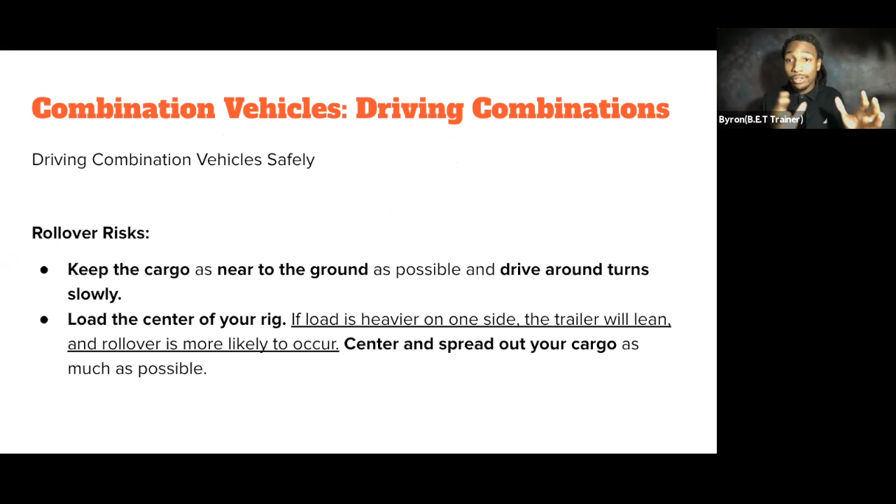When it comes to driving combination vehicles, tractor trailers or 18 wheelers, there are rollover risks, so you want to keep the cargo as low to the ground as possible, and drive slowly around turns because it's a big vehicle. You're not just driving a straight truck, you're driving essentially two vehicles connected together.

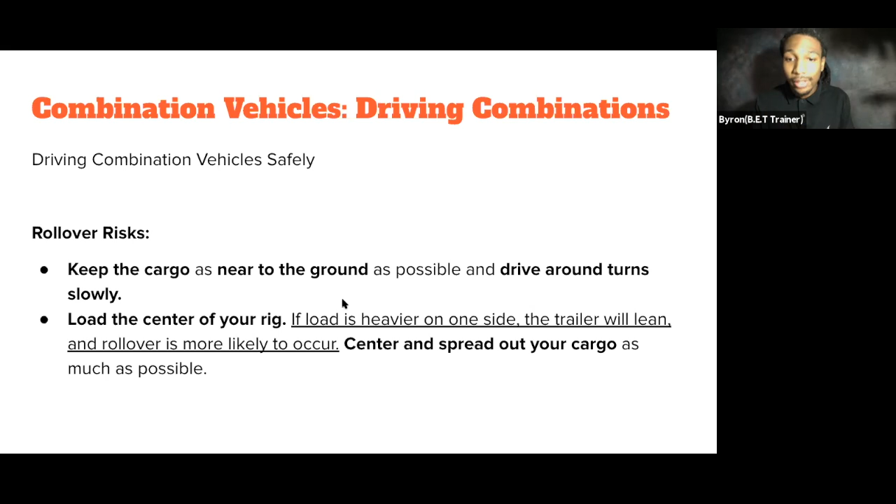Also, you want to load the center of your rig. If the load is heavier on one side or the other, you want to balance it out by putting it in the center and spreading out your cargo as much as possible.

Also, you want to steer gently, and follow far enough behind other vehicles. You don't want to make sudden movements either, because given it's a combination vehicle, you want enough space to have at least 1 second for each 10 feet.

Keep in mind the spacing: trucks and commercial vehicles need a longer gap in order to stop safely. When braking early, keep in mind that with a light load, brakes give poor traction, because combination vehicles and tractor trailers are made to have weight contained in them for the brakes and vehicle to work properly.

With a light load, the brakes not only give poor traction, but it makes it very easy for the wheels to lock up. Therefore, the trailer could swing out and strike other vehicles, and your tractor can jackknife very quickly. So keep in mind, with a light load, the trailer can swing out and strike other vehicles, ending in a jackknife.

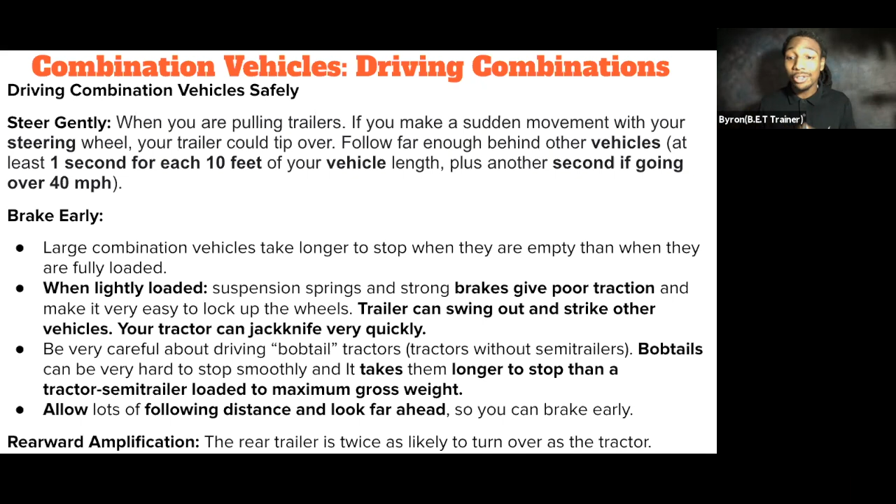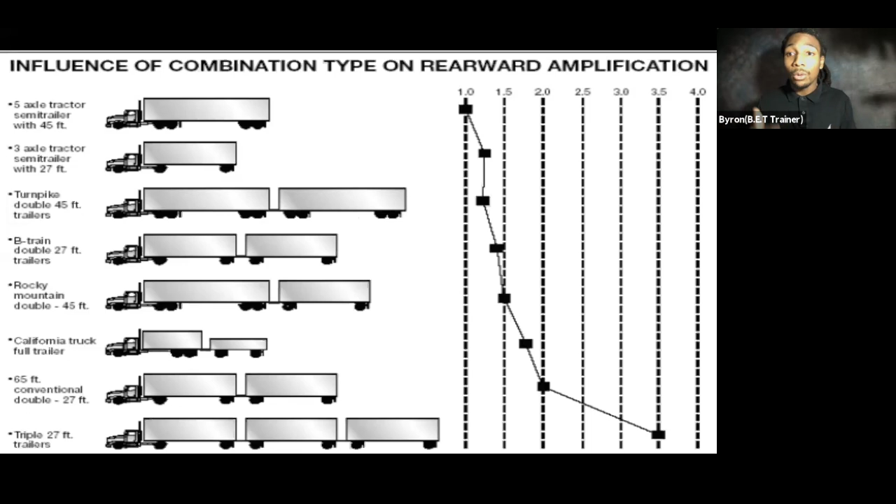This diagram shows that the larger the size of the combination vehicle and the weight of it, the more the rearward amplification effect will come into play, meaning the trailer would tend to turn over very quickly, like in a jackknife. Just keep that in mind.

Depending on where you're going, you have to keep in mind the single axle tractor pulling a long trailer with it, and the landing gear is set to accommodate it.

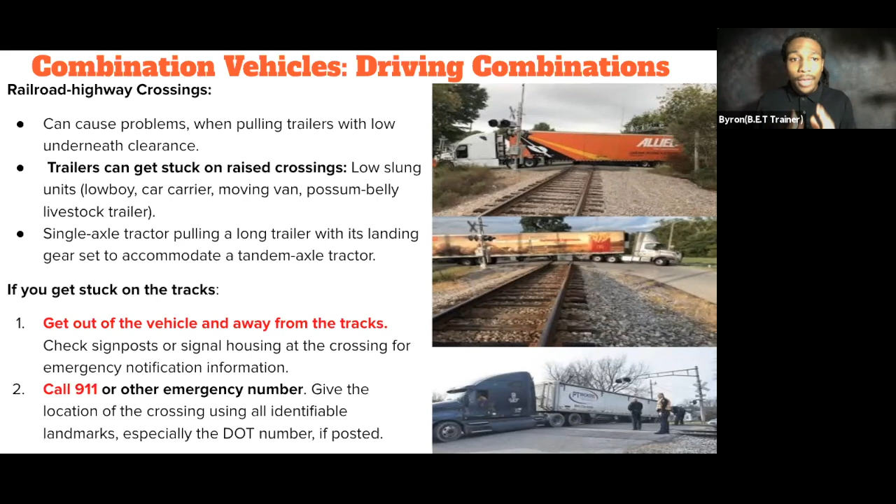In other words, if you do get stuck on the tracks, you must get out of the vehicle and away from the tracks. You have to check for any signal post or housing near crossings, anywhere you can call 911 or another emergency contact, so you can give them the location of the truck and your DOT number if posted, so that safety precautions can be met.

When it comes to preventing trailer skids, the best way is to see it in your mirrors. You have to remember too that once the trailer swings out of your lane, it's really difficult to prevent a jackknife.

Some techniques to keep in mind: when you're using the brake, you want to release the brakes in order to regain control of the vehicle. And you do not want to use the trailer handbrake, because the trailer handbrake is for the trailer.

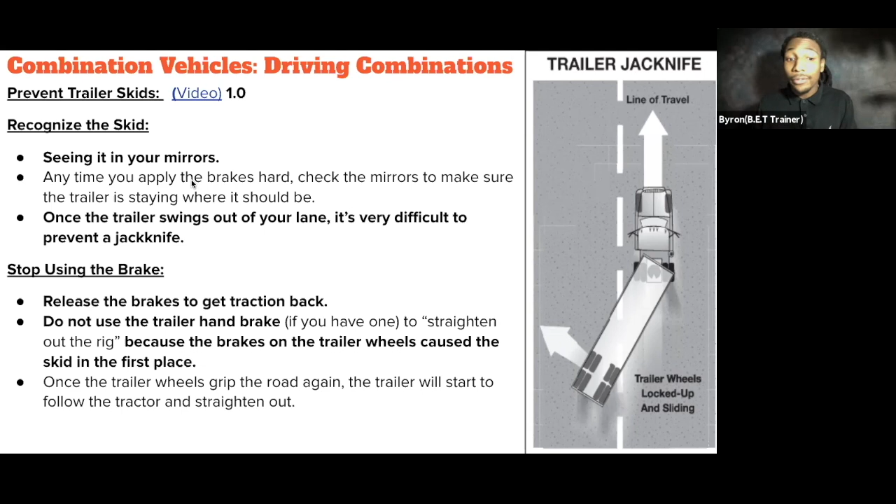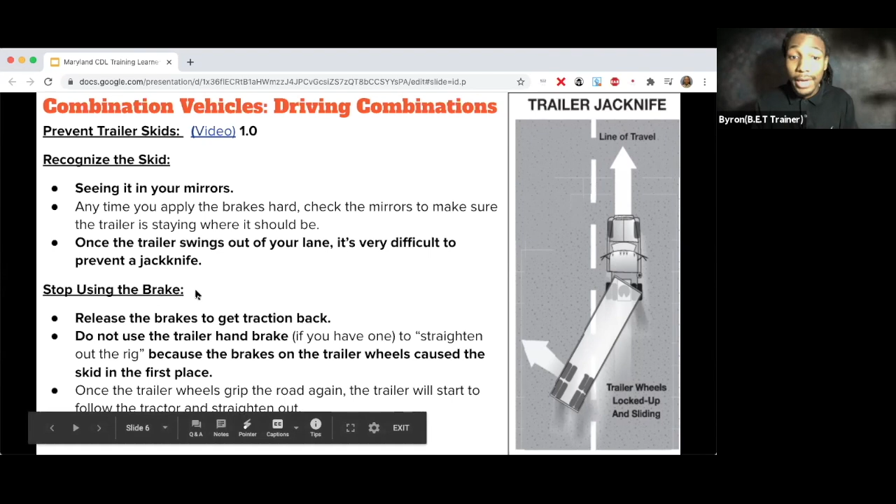The trailer actually is the one that caused the skid in the first place, so you do not want to use the trailer handbrake. Remember, once the trailer wheels grip the road again, the trailer will start to follow the tractor and straighten out. That's definitely something to keep in mind, and this is also going to be on the learner's test for combinations, so remember this.

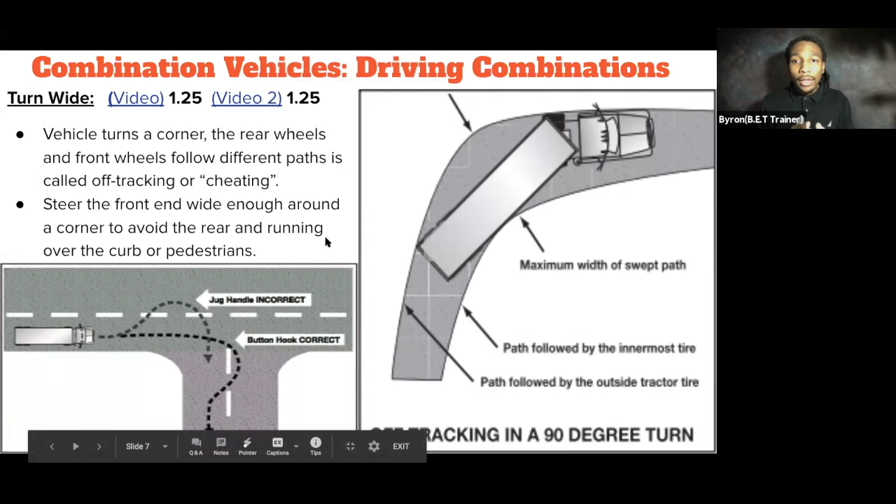Now, when it comes to turning the tractor trailer wide, when you turn the corner, the rear wheels and front wheels follow different paths, and that's called off-tracking or cheating. As you can see in the right hand diagram, when you're turning you want to steer the front end wide enough around that corner in order to avoid the rear wheels running over the curb. So in order to prevent going over the curb, you need to steer wide enough. This shows you different ways of how to do that, the best and correct way of steering.

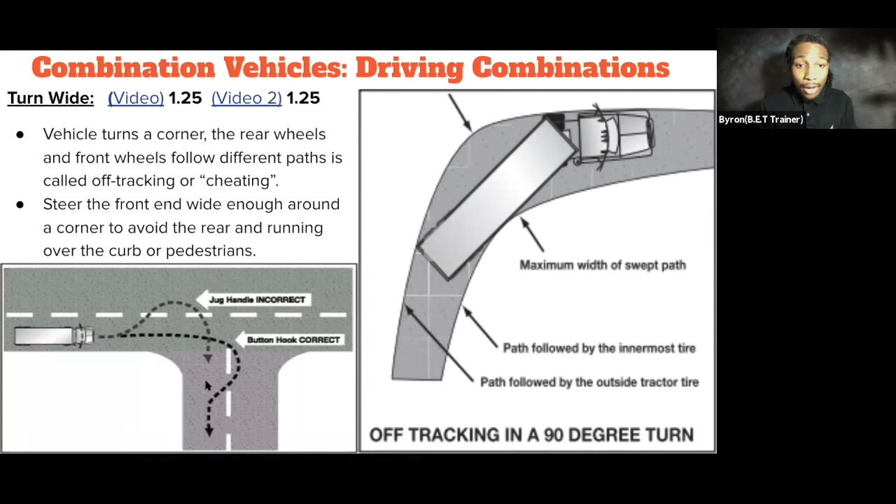When it comes to backing the trailer, this is important. The biggest concept is that you know how with a straight truck, when you back up, if you try to go left, you turn the wheel left. If you're trying to go right, you turn the wheel right.

Well, it's kind of the opposite when it comes to backing up a tractor trailer. When you put it in reverse, if you want to go right, the trailer has to go right. But in order for the trailer to go right, you have to turn the wheel to the left, so that the trailer will go to the right. Then once the trailer goes to the right, you follow and start turning the wheel to the right. Same thing with the other side: if you want the trailer to go left, you have to turn your wheel first to the right. Then when the trailer turns to the left, you start following that trailer and turning your truck to the left. So if you're trying to go right, turn the wheel to the left. If you're trying to go left, turn the wheel to the right. That's the best way to remember that.

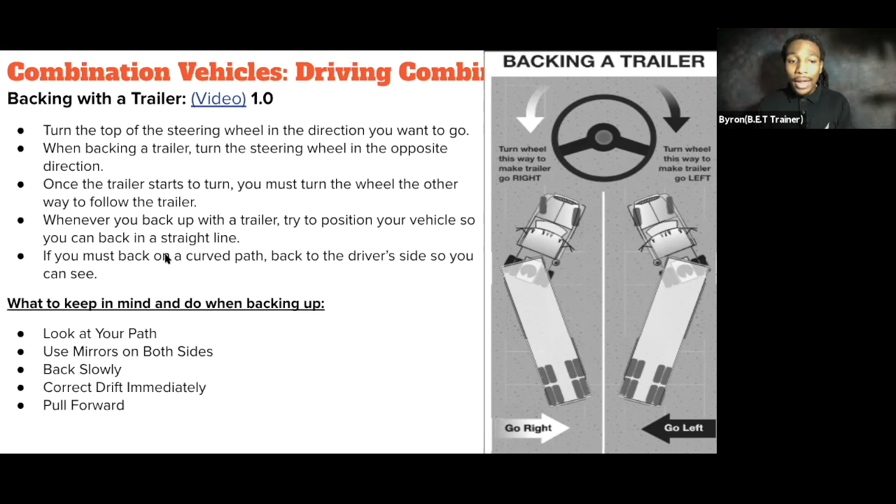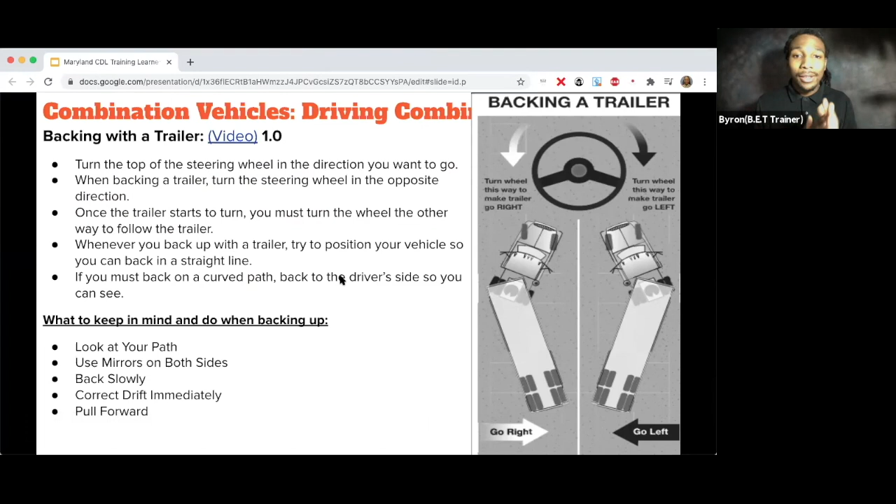You want to keep in mind that when you're doing this, you want to look at your path, use mirrors on both sides - very important. My dad always told me, if you can't read your mirrors, you can't drive, because that is crucial. You want to back slowly and correct drift immediately, as well as when pulling forward. Keep in mind there are different types of backing, but you have to remember the steps and what to keep in mind when backing a trailer.

When it comes to air brakes on a combination vehicle, first we have to talk about what the parts are in order to really understand how all of this works. On tractor trailers, you have the trailer hand valve, which you use to apply the trailer brakes, independent of the towing vehicle brakes. It's usually a push or pull type valve near the driver that supplies air to the trailer brake system through the supply line - that's the trailer hand valve.

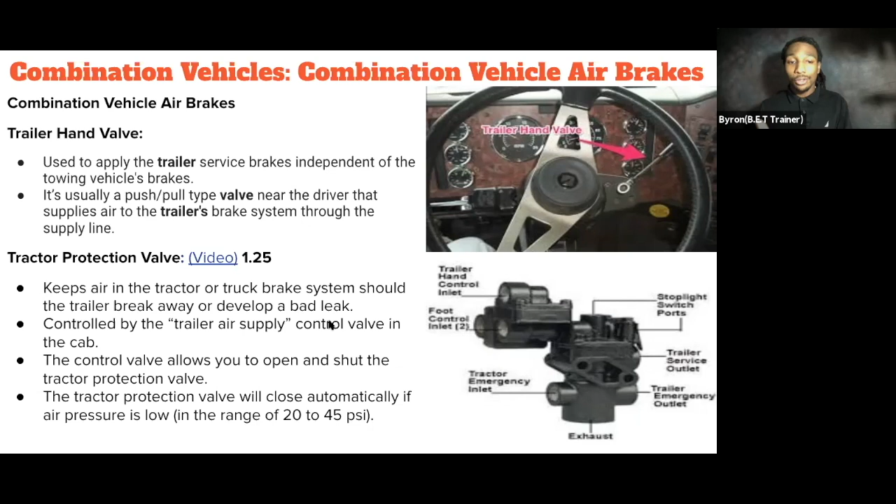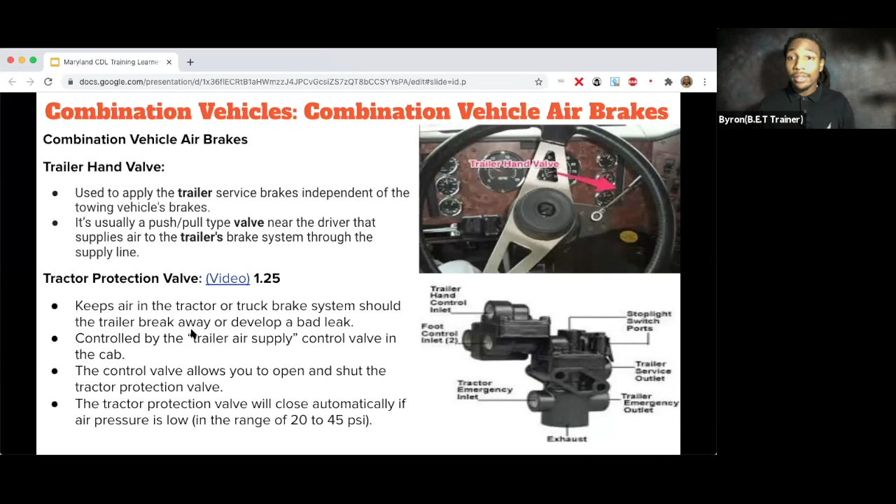Now, the tractor protection valve keeps the air in the tractor or truck braking system, should the trailer break away or develop a bad leak. It's controlled by the trailer air supply control valve. So the trailer air supply is for the trailer. What to keep in mind is that the tractor protection valve, for the trailer air brakes, will close automatically when the air pressure is low, between approximately 20 to 45 psi - that emergency trailer brake will pop out between 20 to 45 psi. Again, the trailer air supply control is used to control that tractor protection valve we mentioned earlier, and the valve will pop out when the air pressure drops to approximately 20 to 45 psi.

Remember this: the emergency position is used to shut the air off and to put on the trailer emergency brakes. You have to remember that the tractor protection valve controls, or the emergency valves on older vehicles, may not operate automatically. So there may be a lever, rather than a knob, and the normal position is used for pulling a trailer.

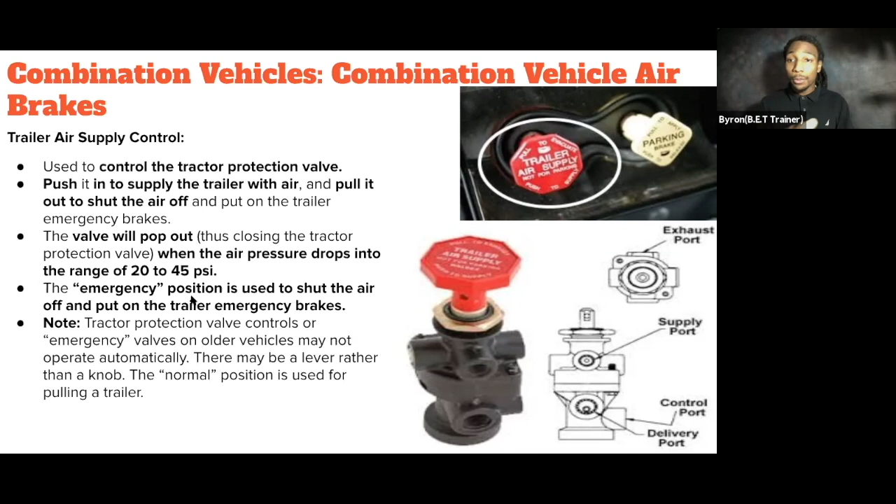Keep in mind the emergency position is used to shut off the air and put on the trailer emergency brakes. Meaning that when you pull that trailer valve out, the emergency brakes are activated.

Now, when it comes to the lines, read in between the lines, but you have different types. You have two airlines: one is the service line, which is blue, the other is the emergency line, which is red. You also have a third line, but that is not an airline. That's an electrical line, used to connect the electricity from the trailer to the tractor. Keep in mind that the service airline, which is blue, allows air to go to the service brakes, while the emergency airline, which is red, goes to the trailer emergency brake.

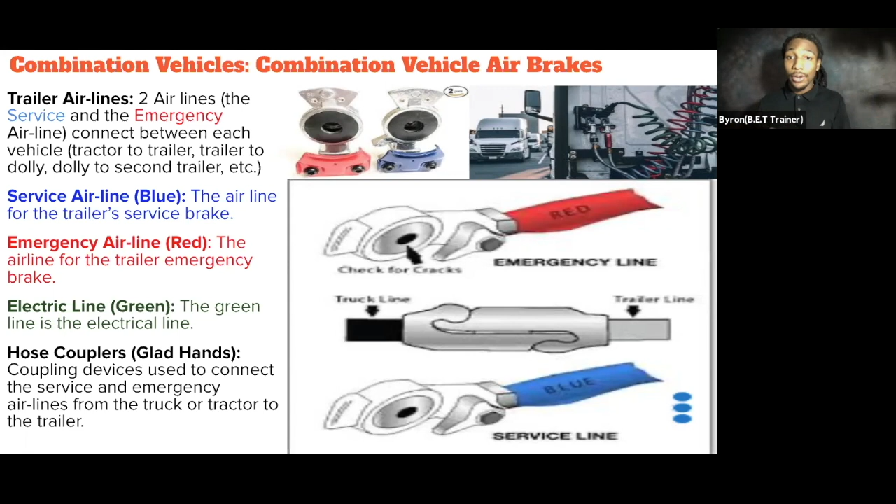Now, when it comes to the trailer air tanks, they're filled by the emergency supply line from that tractor, and they provide air pressure used to operate the trailer brakes. Air tanks, air supply contains air tank - that's a way to remember that.

Now, when it comes to shut off valves, those are used in the service and supply airlines at the back of the trailers, used to be able to tow other vehicles. The valves permit closing the airlines off when another trailer is not being towed. Remember, you've got the trailer service, the parking, and the emergency brakes.

As we mentioned in air brakes in week 2, it's all the same thing, just different names for different functions. The trailer service, parking brake, or emergency brakes are all three basic braking systems.

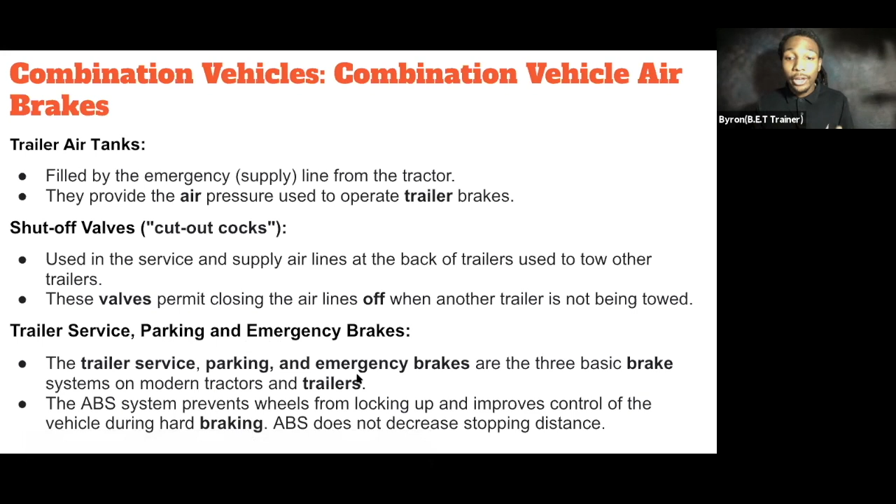Now, ABS, anti-lock braking system, prevents wheels from locking up and improves control of the vehicle during hard braking. It doesn't mean that it decreases stopping distance.

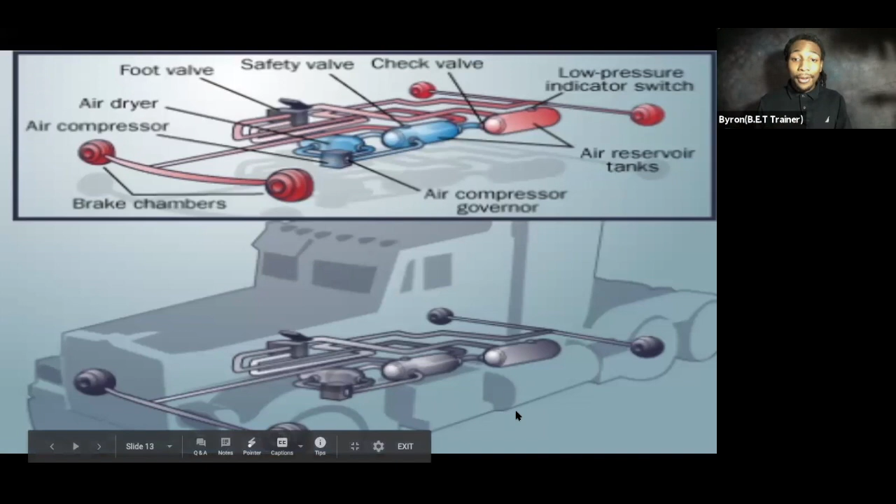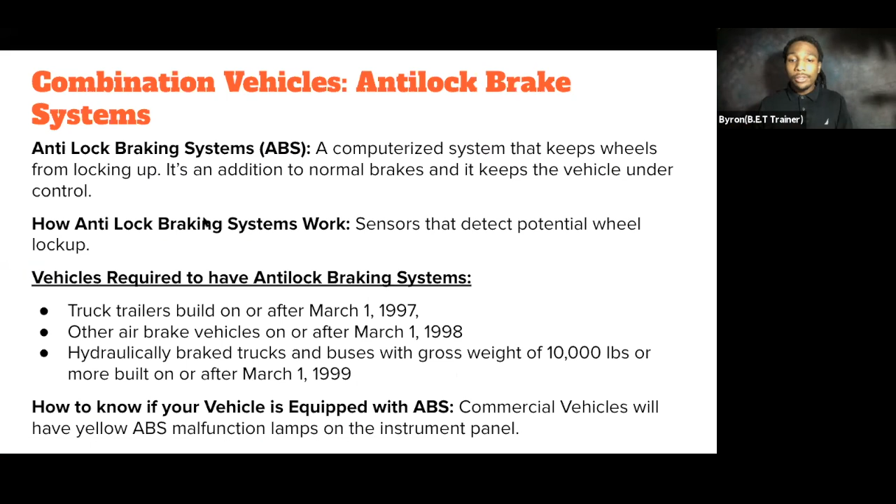Here's another diagram view of the main parts, such as the foot valve and the air reservoir tanks. All of these components together are very crucial and important. We mentioned anti-lock air braking systems in week 1 with general knowledge, and week 2 in air brakes, so this is just a reminder of the anti-lock braking systems.

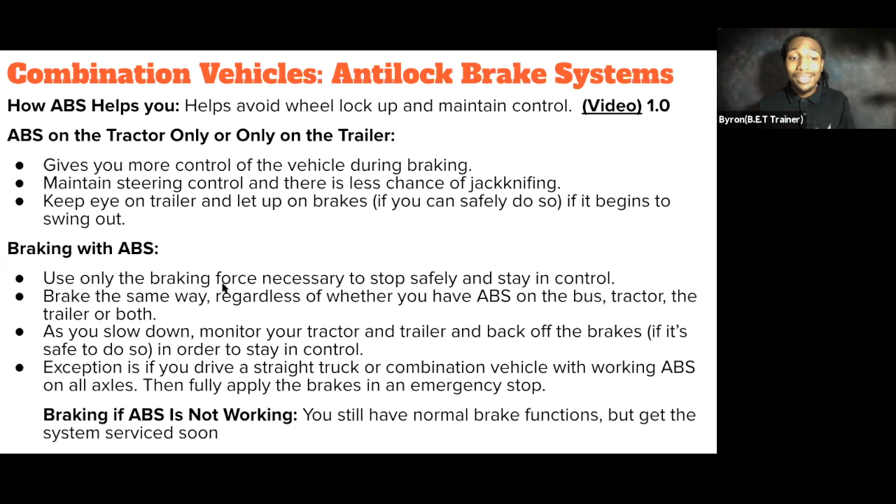Remember that the ABS on the tractor or only on the trailer gives you more control of the vehicle during braking. When you maintain steering control, there is less chance of jackknife. Just remember, braking with ABS, you only use the braking force that is necessary.

Now, when it comes to anti-lock braking systems, you brake as you always have. Just remember, as you slow down, you monitor your tractor and trailer, and you back off the brakes when it's safe to do so, in order to keep control. We want to tend to brake, but sometimes you have to ease off the brake pedal and just maintain, and you tend to have more control that way.

The trailer is less likely to swing out, but if you lose steering control or it starts to jackknife, you've got to let up off the brakes. Don't hold the brakes, just let it off.

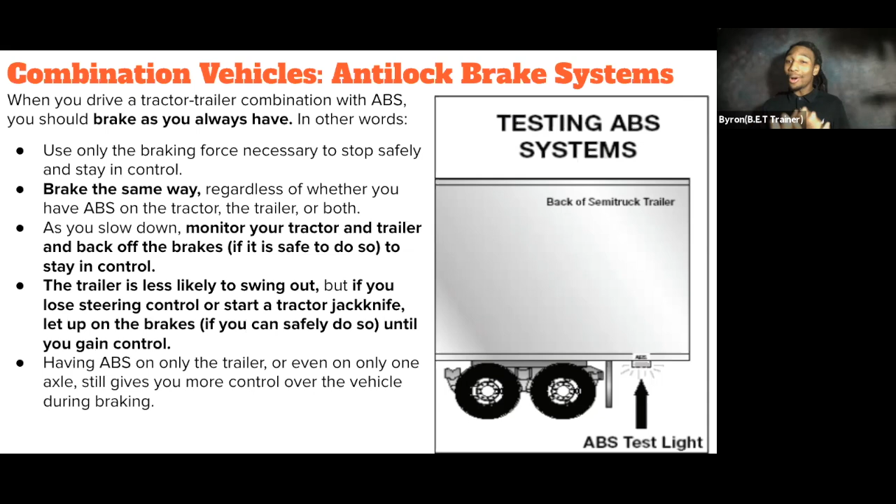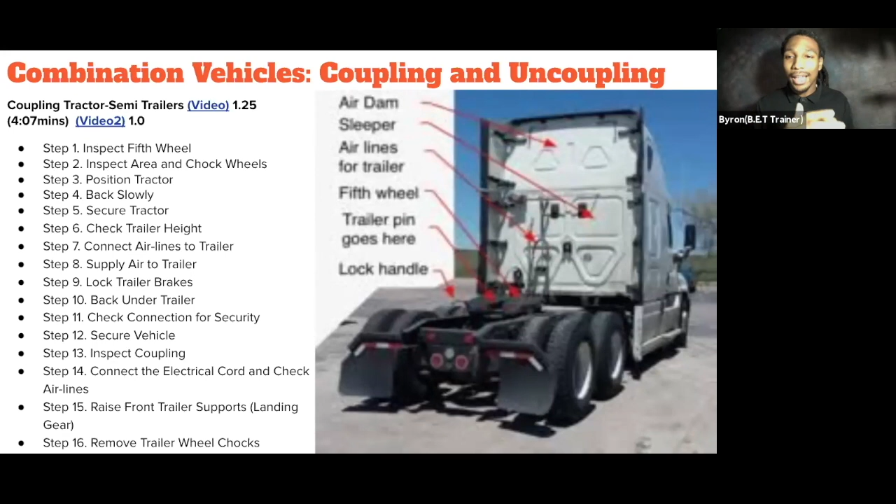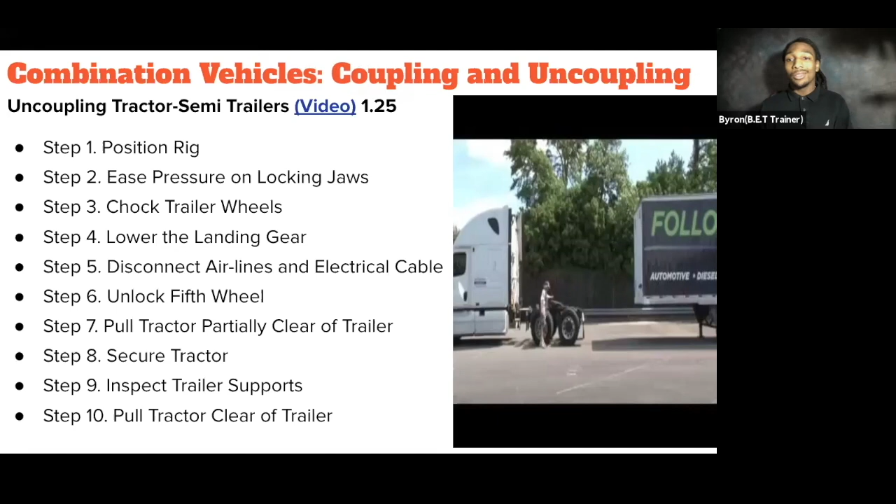Now you probably were saying, alright, I know how to couple, but what about uncoupling? Well, don't worry, we're going to go over that now. Just remember those steps, those orders, and of course that definitely won't take time. But once you remember, it's a number system.

10 steps to uncoupling, that's 1, 2, 3, and as you go ahead, say this to yourself. This will definitely help you remember, and it will help you retain information very, very well.

Now, you do have to remember when it comes to coupling a pintle hook as well. So, 4 steps to coupling that: 1, inspect the pintle hook, unlock the lock pin, open the latch. 3, lower the drawbar into place.

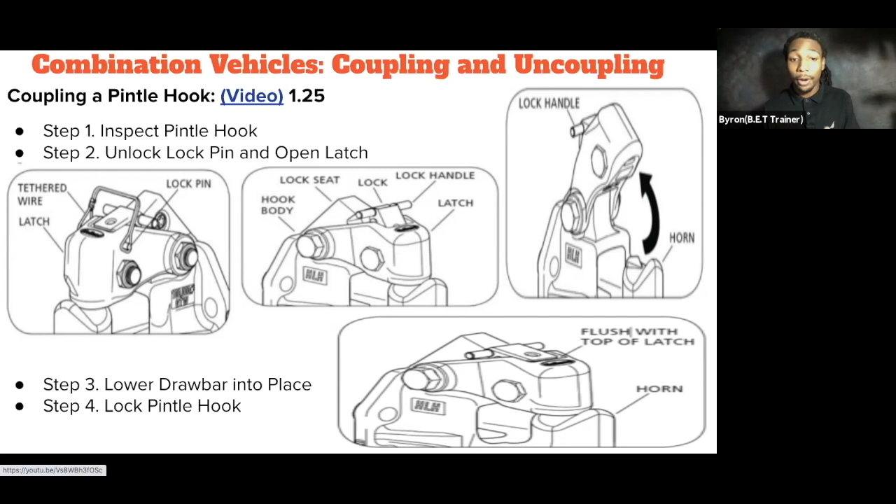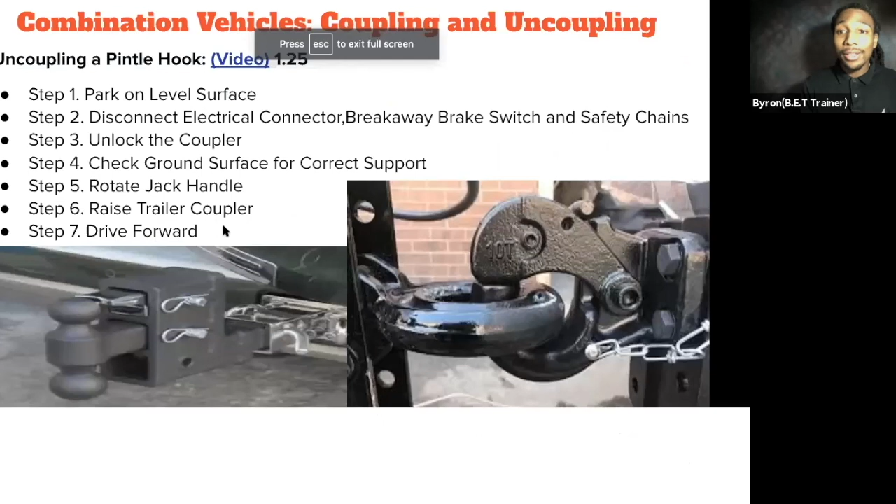Step 4, you want to lock the pintle hook. What is a pintle hook, and how are you using that? How is it best to use it? Now, of course, the steps of uncoupling the pintle hook are very crucial as well.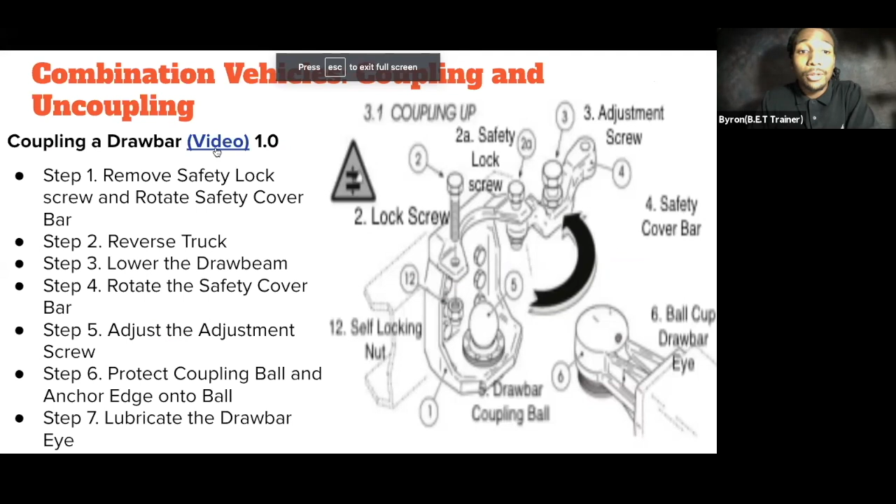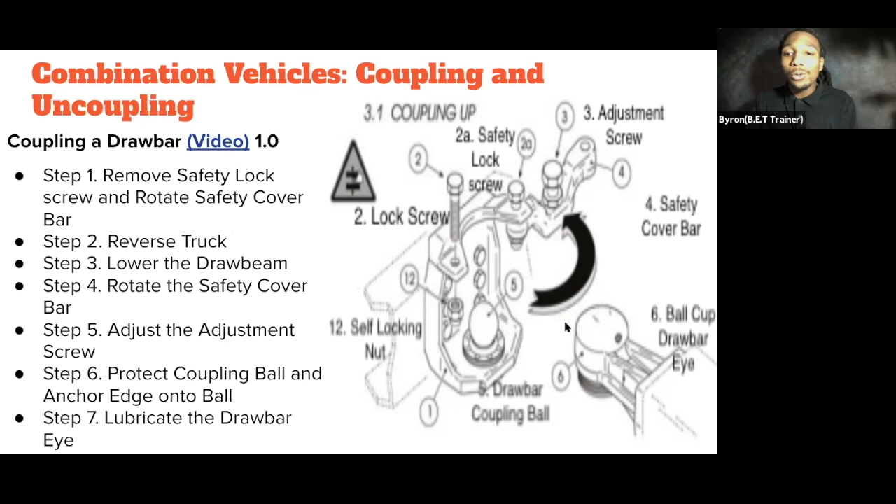Now, when it comes to coupling a drawbar, you want to safely lock the screw, remove the safety lock screw, and rotate the safety cover bar. Remember, these are the 7 steps to coupling it. This diagram shows the parts and how it's connected.

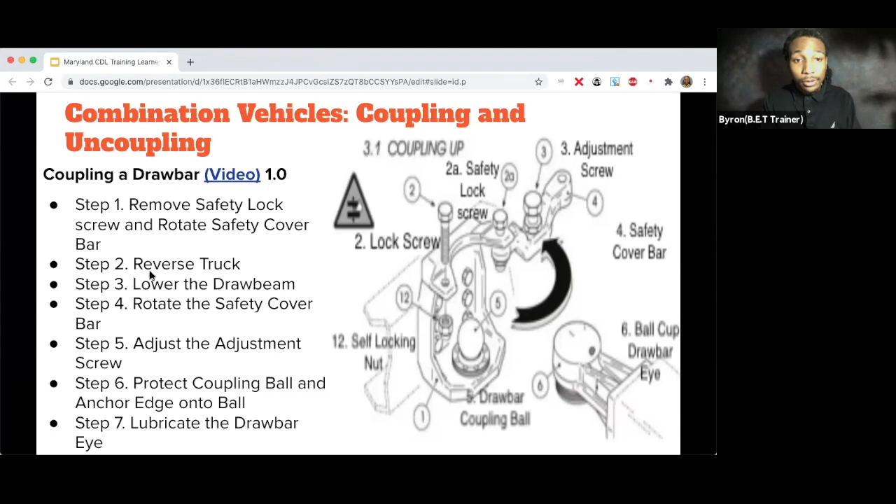Just remember, when it comes to coupling a drawbar, there are 7 steps you want to remember. When it comes to uncoupling a drawbar, the 4 steps are: turn the trailer brake on, remove the cover and loosen screws, rotate the safety cover bar and lift the trailer drawbeam, then lock the safety screw and tighten the self-locking nut. This diagram shows the parts and how they're connected.

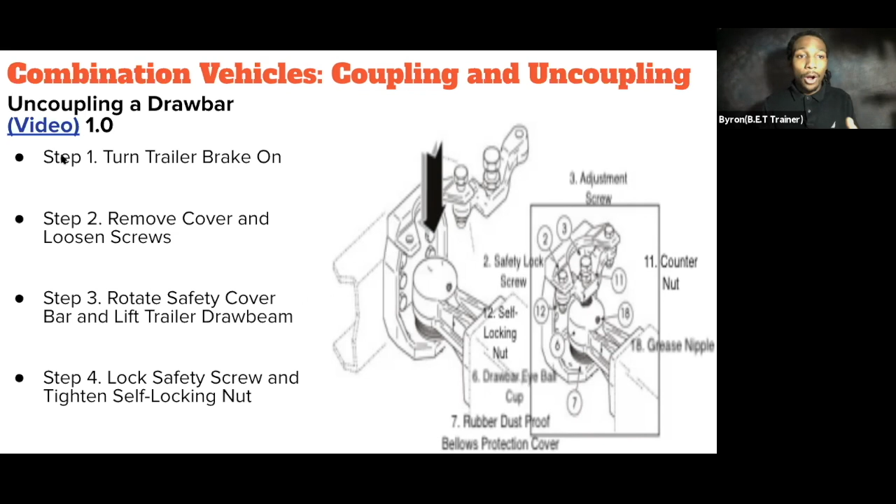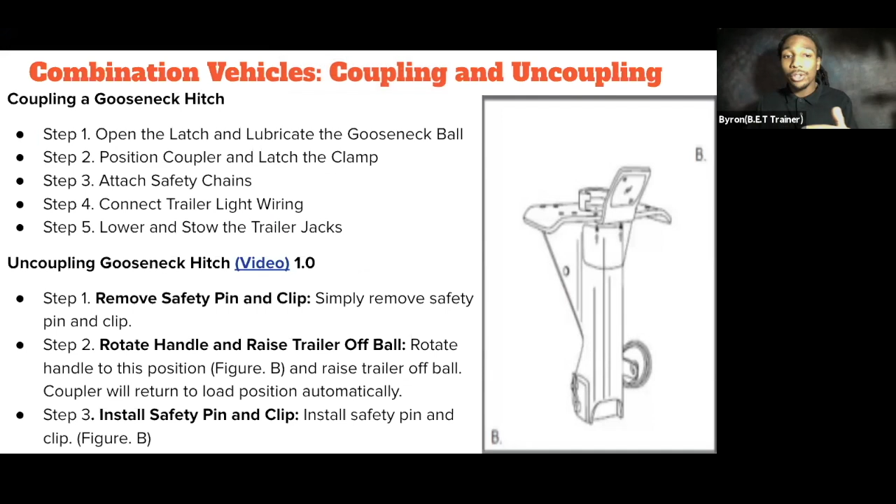When it comes to coupling a gooseneck hitch, step one, open the latch and lubricate the gooseneck ball. Step two, position the coupler and latch the clamp. Step three, attach the safety chains. Step four, connect the trailer light wiring. Step five, lower and stow the trailer jacks.

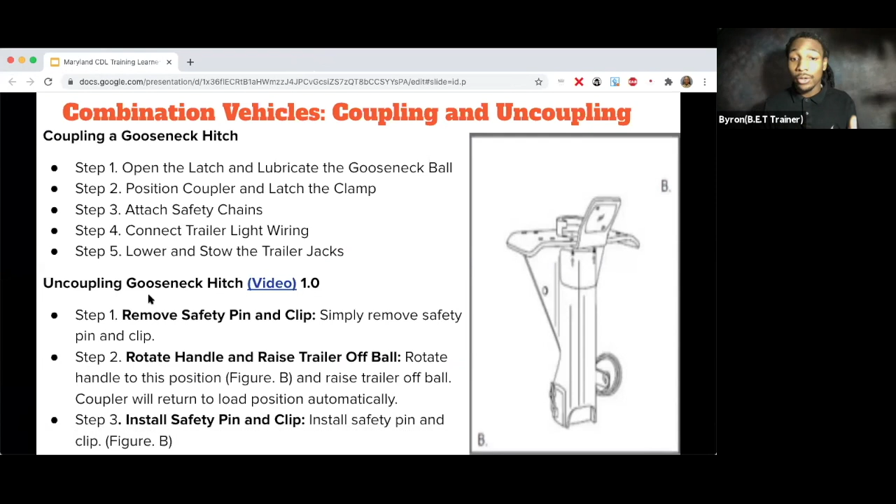That's the steps to coupling and uncoupling a gooseneck hitch. Remember, the first step to remove it is to remove the safety pin and clip. Second, rotate the handle and raise the trailer off the ball. Third step is to install the safety pin.

Now, when it comes to additional things to keep in mind, you have the fifth wheel, the air and electrical lines to the trailer, the sliding fifth wheel, and the landing gear. Remember that when fully raised, you want to make sure there are no missing parts, nothing bent or otherwise damaged, and you want to crank the handle in place and secure it. If power operated, check for no air or hydraulic leaks.

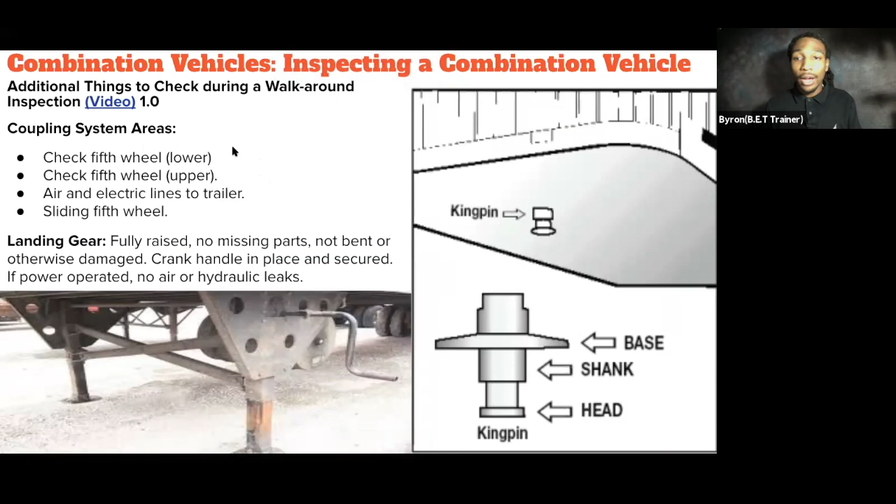Now, you also want to check that the air flows when checking the brakes. You want to check that air flows to all of the trailers. Use the trailer hand brake, which provides air to the service line. Then open the emergency line shut-off valve at the rear of the very last trailer, and you should hear air escaping, which shows the entire system is being charged.

When it comes to testing emergency brakes, you want to pull gently on the trailer with the tractor to check that the trailer emergency brakes are on. When testing the service brakes, check the normal air pressure, release the parking brakes by pushing it in, pull forward slowly and apply the trailer brakes, using the hand control valve if it's equipped.